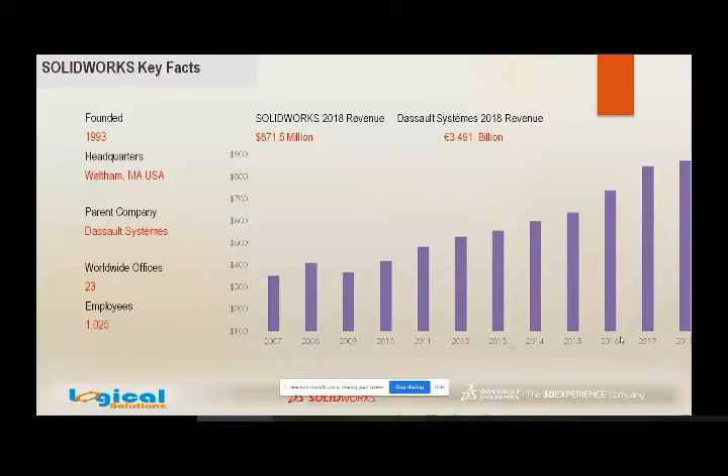Let me move on to the next slide. SolidWorks today has been used by over 5.6 million users around the globe, in over 2.75 lakh customers, in 80 countries, having one passion, that is design.

So apart from the counts, we also have certified users. So if you have any manpower requirement, we can provide you with certified users.

Coming to MySolidWorks, MySolidWorks is a one-stop online solution for all SolidWorks tutorials. If you have any queries, you can watch the complete tutorial videos provided in MySolidWorks and all the e-courses.

When coming to 3D Content Central members, 3D Content Central is an online website where you will find all the SolidWorks community members. Whoever has SolidWorks in their industry, those members are in 3D Content Central, sharing their 3D and 2D designs. So if you like their designs, you can approach them, or else directly place a quotation. It's purely a marketing tool.

When it comes to serving industries, SolidWorks is not just confined to one particular industry vertical, let's say automotive. It has expanded to various industry verticals like aerospace, engineering services, process and plant, industrial equipment, consumer products, high-tech electronics, whatnot. You name it, it has expanded its wings in all the industries.

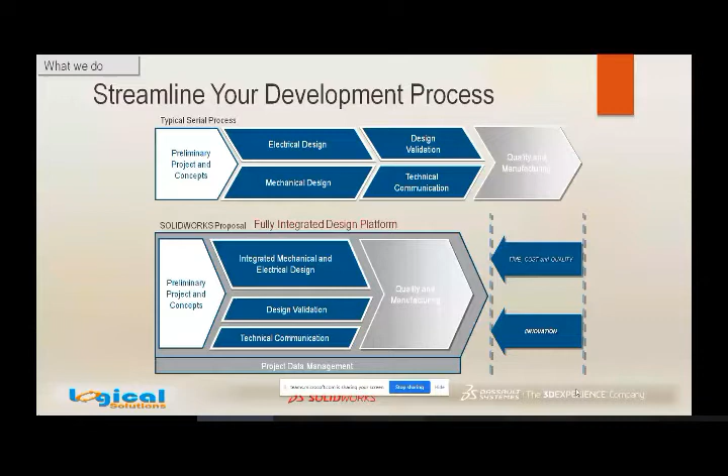Coming to the basic package that we offer, that is a 3D CAD, in which we design SolidWorks mechanical components. This is a basic for all the packages, SolidWorks mechanical CAD.

After this, if the designer is interested in performing any simulations, we have SolidWorks simulation, flow, and plastics modules. All these are actually add-ins.

If the industry is oriented towards electrical, we have SolidWorks electrical, 2D and 3D schematic, and PCB, printed circuit board. So we have these modules also included in electrical.

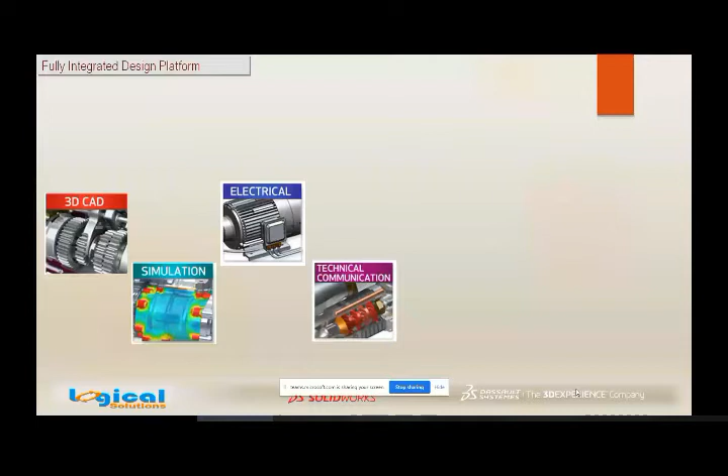Coming to technical communication, it has eDrawings, DraftSight, and composer in it. All these are used to create brochures, manuals, service manuals, repair manuals, and assembling and disassembling manuals.

Moving forward, visualization - SolidWorks visualization is a great tool to create models that look realistic, how they look in real life. We can render these models.

Coming to product data management, when it comes to legacy data, we all know that it has to be secured. So we have a solution for that, product data management, SolidWorks PDM. We can also create any revisions in PDM.

Now SolidWorks CAM is integrated to SolidWorks CAD. So whatever you model in the 3D environment is linked with computer-aided manufacturing.

Let us talk about the 3D CAD advantages which we offer, starting with part design. When it comes to other industries who opt only for 2D softwares, you can see that in 3D softwares we have the flexibility of seeing the model, how it is designed prior to manufacturing. So we can rectify all the errors beforehand.

We can apply color, we can apply material properties like mass. You can get surface area, you can get how much volume it is enclosed within. With these kind of things, you can eliminate manufacturing errors to a great extent.

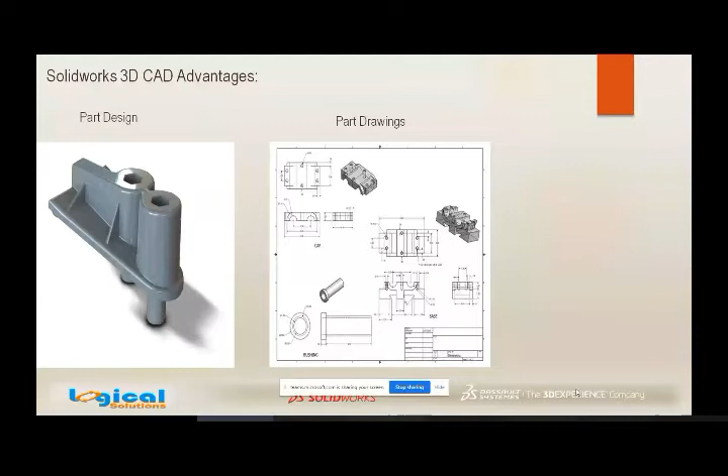Coming to assembly design, it is very easy to position any component and create animations of assembling and disassembling videos. These kind of things can easily be done in the assembly design. These are the advantages of 3D CAD.

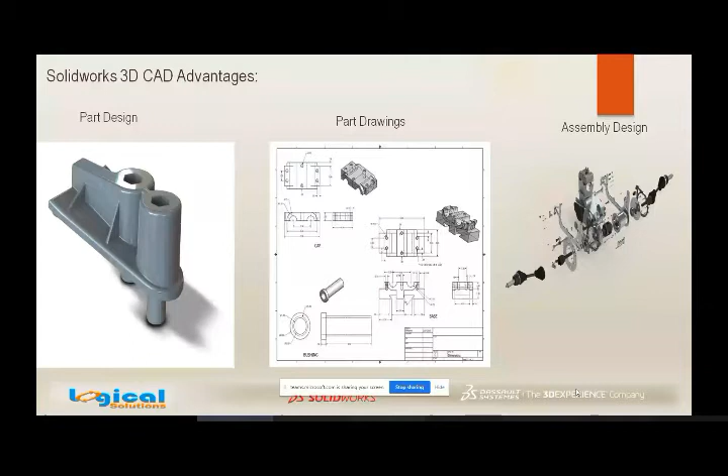Apart from that, assembly drawings can easily communicate between the designer and the manufacturer. You can see how easily a person can understand these kind of things. You can take advantage of automatic ballooning, and you can use configurations to cut open the assembly like this to show more details. Such is SolidWorks.

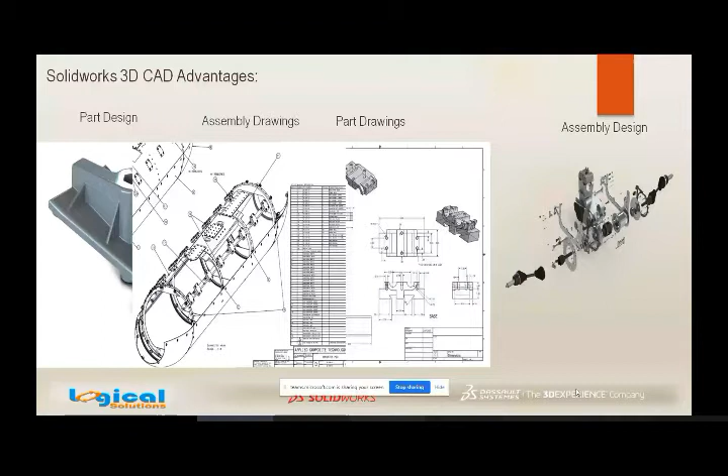Then eDrawings is an effective communication tool. If a designer has to show his model to the manager, he can use eDrawings. In eDrawings, the part feature history is not shown. Only the distance can be measured.

You can section the component. You can perform any animations with all the views - Control 1, Control 2, Control 3. All the views can be animated in eDrawings.

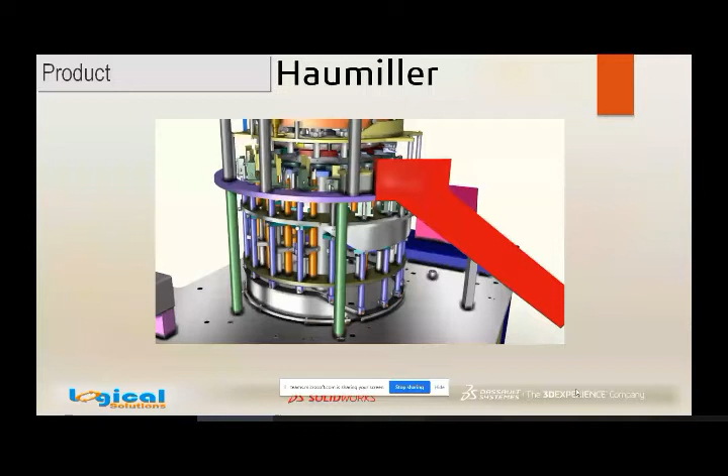Let me show you an animation so that you can easily understand what I am about to say. So this is a Haumiller. You can see how it is rotating. It's actually following the path which is below, and you can see here the green color part which I'm about to design.

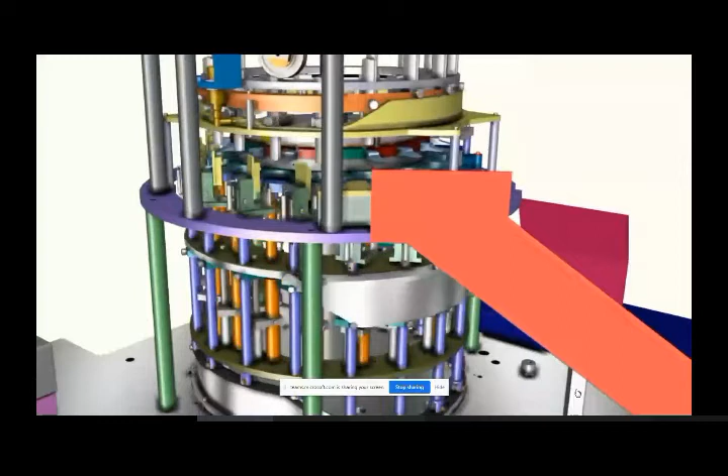You can see how it is having a reciprocating motion. With that motion, it will actually perform a capping procedure. So that brings us to the end of the animation.

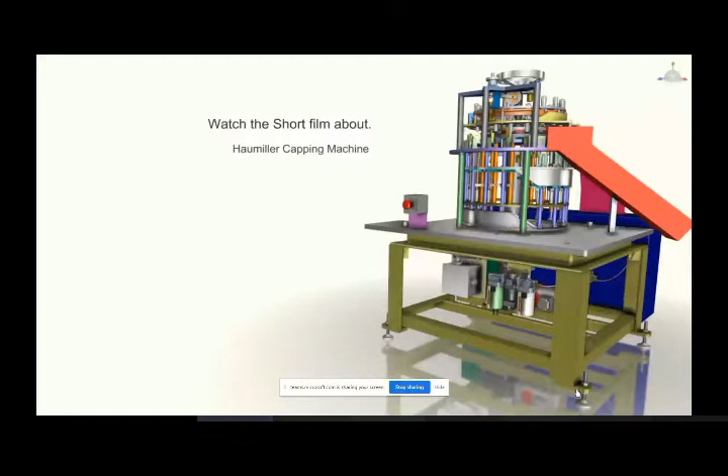Let me move to the next slide. In this slide, we are going to see how easily we can design a part in SolidWorks and how effectively we can create drawings. I'm going to take you through this. Let me open SolidWorks.

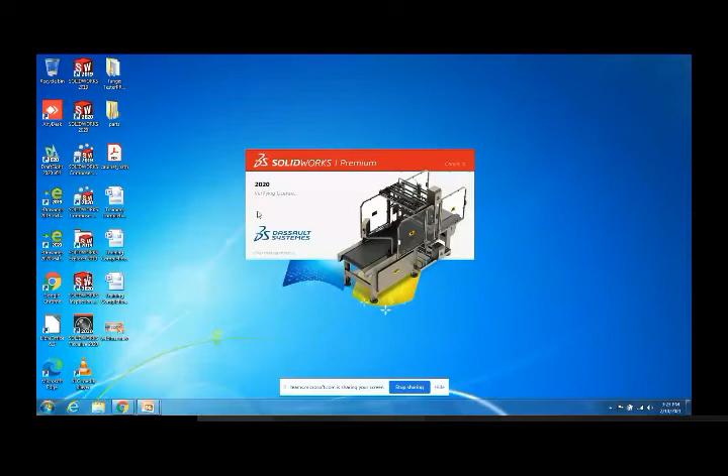So it is taking some time to open, but meanwhile, this is the part design. We'll see how easily we can create parts and drawings.

When it comes to other softwares, drawings become troublesome. But in SolidWorks, it is very easy to create sectional views, to dimension the views from the models, to arrange the dimensions and make modifications. It's very easy. Let me take you through the part.

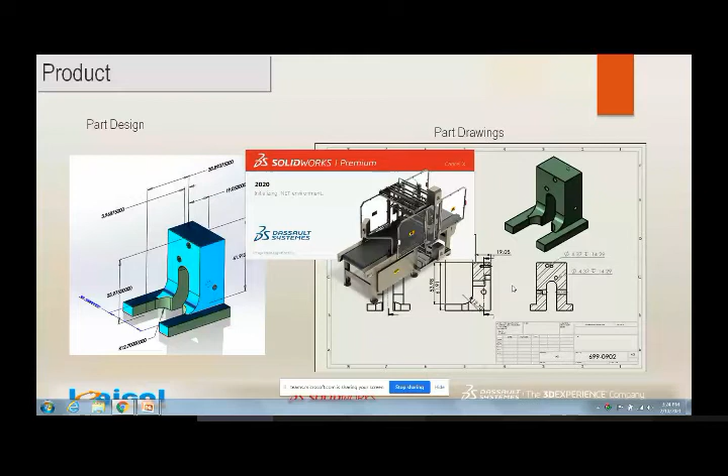So this is a part. Can everyone see this, what I'm showing you? So this is a component.

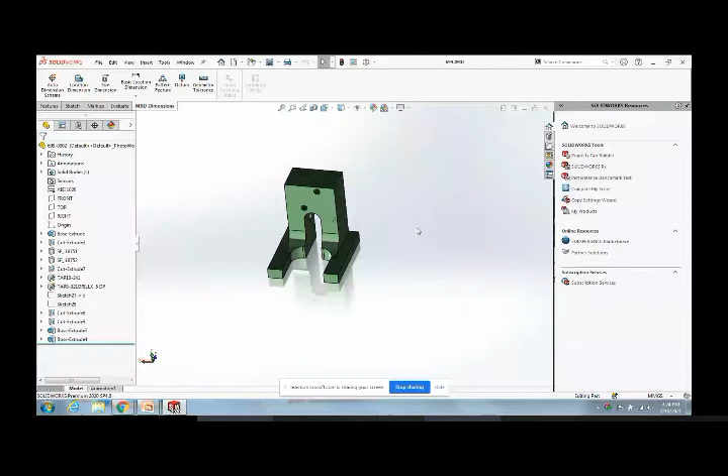Before showing you this component, let me open the assembly. Let me open it in large design review mode so it will open up quickly, and then I'll resolve it. I hope everyone knows about large design review mode.

So this is the assembly which I have taken as an example. In this assembly, I'll take the example of this component you are seeing here, and I will model this component. Let me open this component.

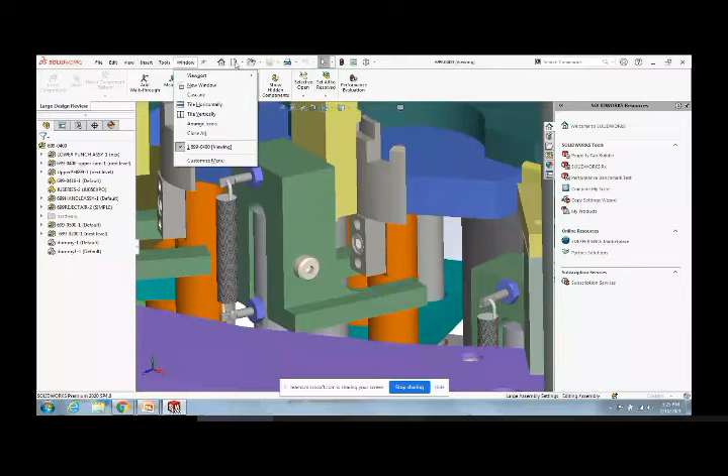So this was the component I showed earlier. Let me use the rollback bar and show you how this component has actually been created.

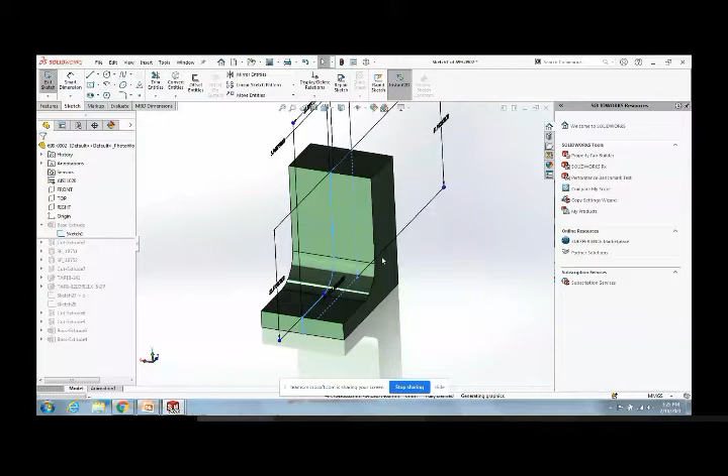So you can see if I go into the sketch, I'll just delete one dimension and show you how to dimension it. So now it is fully defined, and you can make use of the shortcut bar.

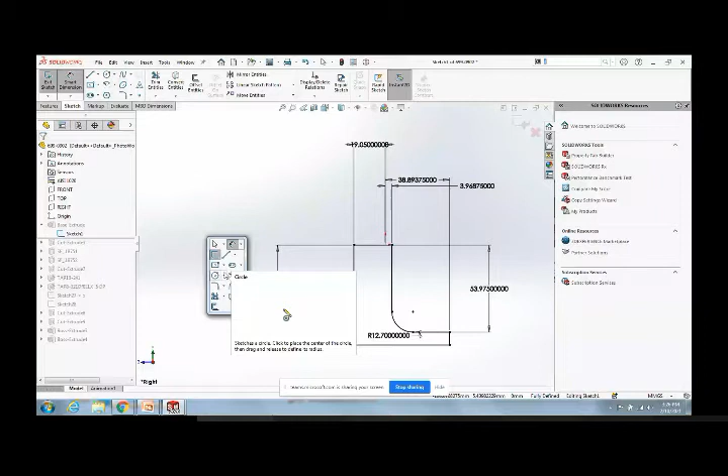In the shortcut bar, you can see all the commands you frequently use, and you can place them in this shortcut bar. Okay, so a couple of cuts like this.

So finally, it has been built like this. Let me create a drawing of this. So this was the drawing I already created. Let me close this and create a new drawing.

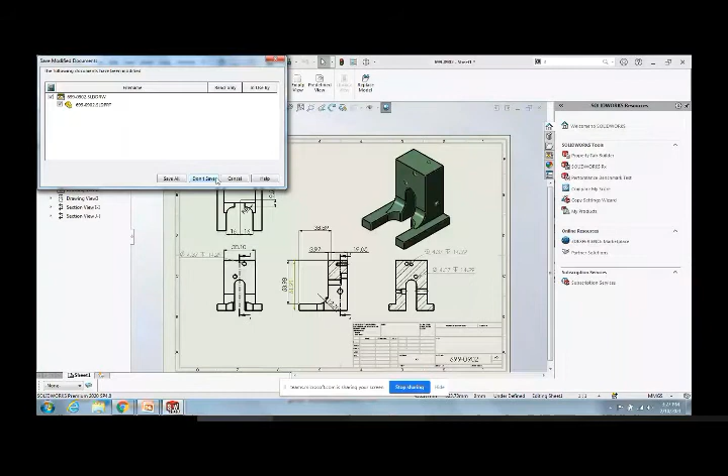So I'm choosing the file, the sheet size. Click OK. Now in the view palette, you can see the views have been automatically populated, and I'll just drag the top and front view, and with the projected view activated, I'll get the top projection also.

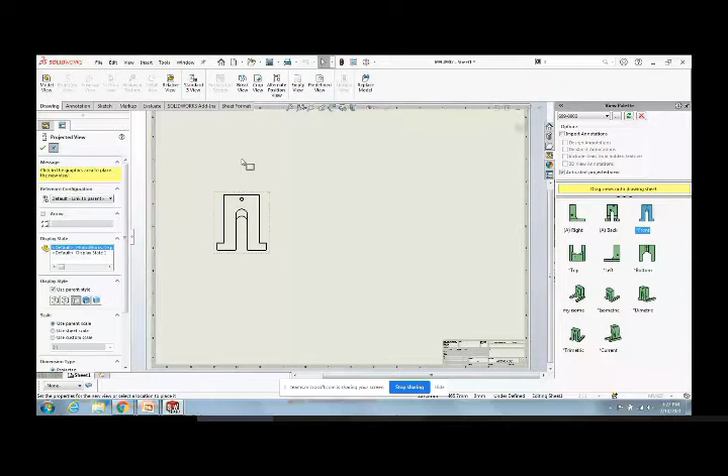So, using these two views itself, I'll perform a sectional cut using the mouse gestures, and you can see how easy it is to create. Another sectional view, I'll create it over here.

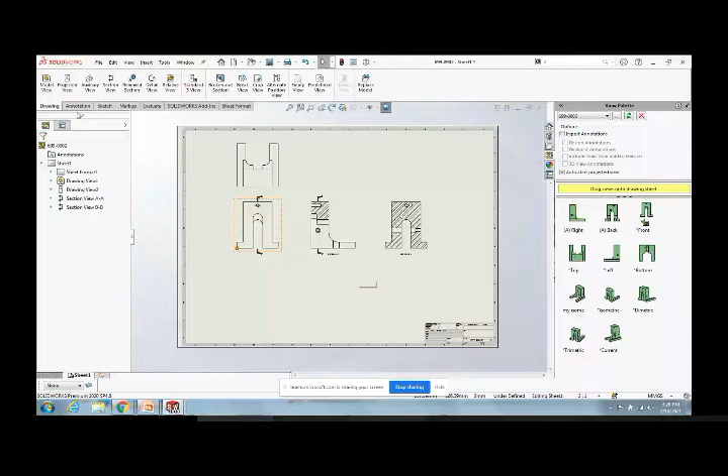So I'm actually showing all the hole details over here, and now we want some dimensions to cover it up. So we will go to Annotations, Model Items, and choose these features. You only use the selected features in the model items.

Like this. Use the hole callouts—it is best to use hole callouts when you have hole wizard features done in the part, because it will give you detailed text like this. You can see it will give you the symbol representation, whether it is a counter bore or counter sunk, and through-all as well, these things.

So when it comes to changing the hatch, you can just select it. You can apply the hatch according to the materials, different hatches.

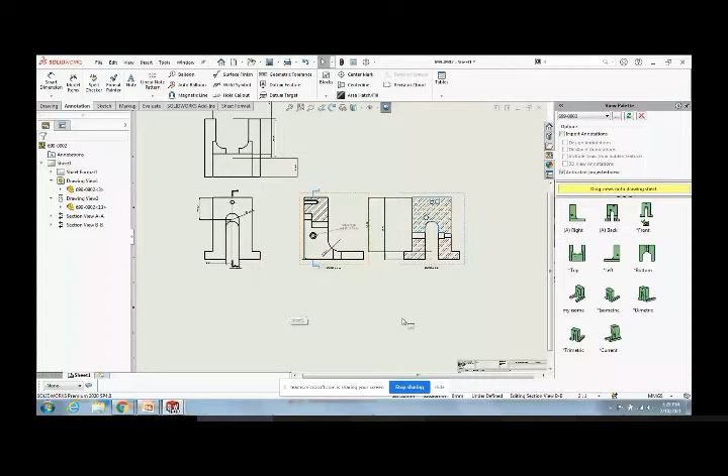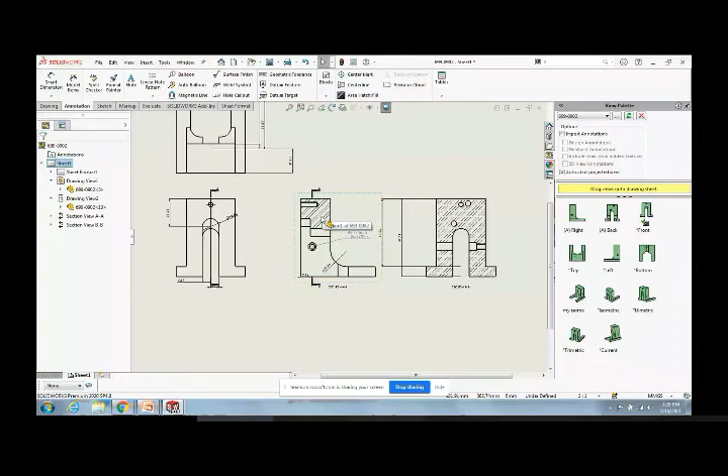So if you want to change the dimensional sizes, let me show you the dimensions. Just go to font, and you can increase the font to automatically see the changes—I'm increasing it to 15. You can see it has been increased. So accordingly, all the things like the dimensional arrow sizes can be controlled in Options, Document Properties. You can look forward to this.

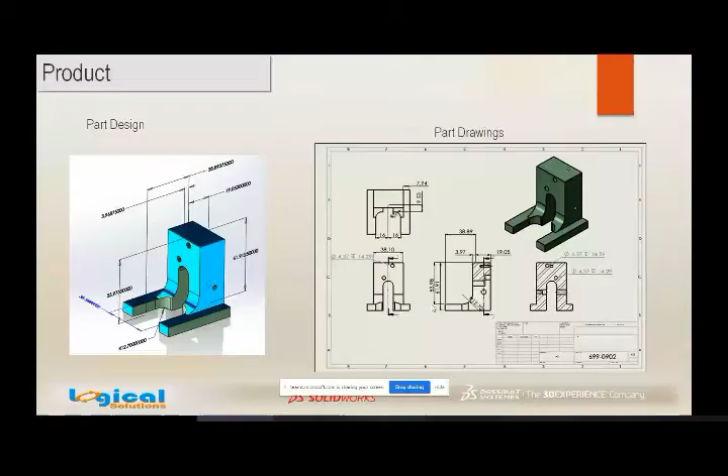Let me go back to the presentation and explain the benefits of part designing. The advantages in part designing and part drawings are using the shortcut bars. Shortcut bars give great flexibility when a designer is working in full screen mode.

All the tools they are familiar with, they can include in the shortcut bar and use them effectively. And when it comes to learning SolidWorks, the learning curve is very good—you can see how all the commands have been categorized specifically, like features are categorized where only features are there.

Sheet metals categorize only sheet metal features, and weldments categorize only weldment features. Likewise, everything is categorized, making it easier to learn. So new people can understand SolidWorks in about 1 month itself.

So that is a great advantage we offer. Hole Wizard features, as I already told you, consist of over 1 million different standard holes around the globe. You can make use of this, and also use smart fasteners, which come with all the toolbox components with the exact sizes of the holes.

Automatic view placement lets you just drag and drop the view and place it over the drawing sheet. You can get all the dimensions, populate all the dimensions, and arrange all those dimensions. I just forgot to show the arranging of the dimensions.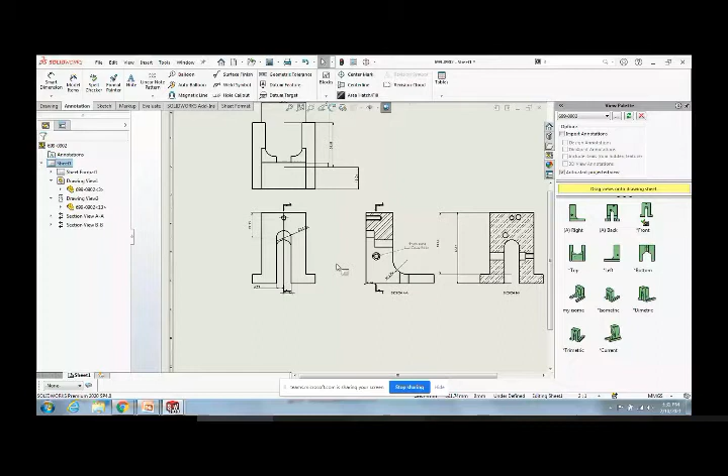If some dimensions are going into the view, let me show you, these kinds of things can be easily resolved. You can just drag it and use auto arrange, and automatically all the dimensions will go out of the view. So these are automatic arranging of the dimensions. We can take advantage of automatic view placement, automatic dimensioning, and arranging of the dimensions.

So with all these advantages in the part designing and part drawings, we can actually avoid the drawing errors effectively.

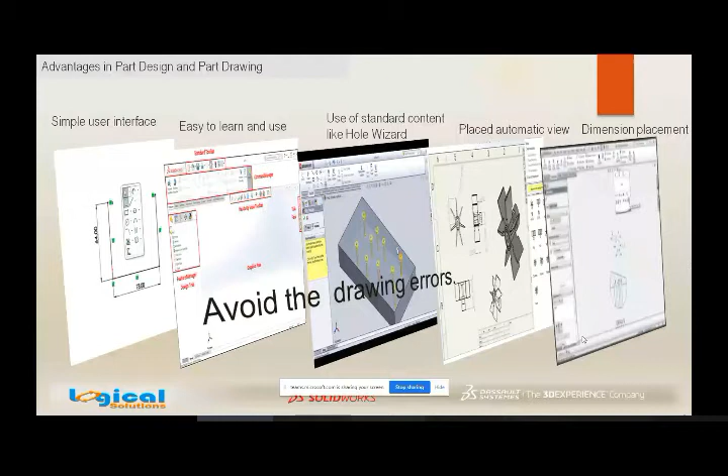So we'll move on to the assembly design. Let me open this assembly I'm showing you and create the assembly drawings, also generate bill of materials, and generate automatic ballooning. Let me open SolidWorks.

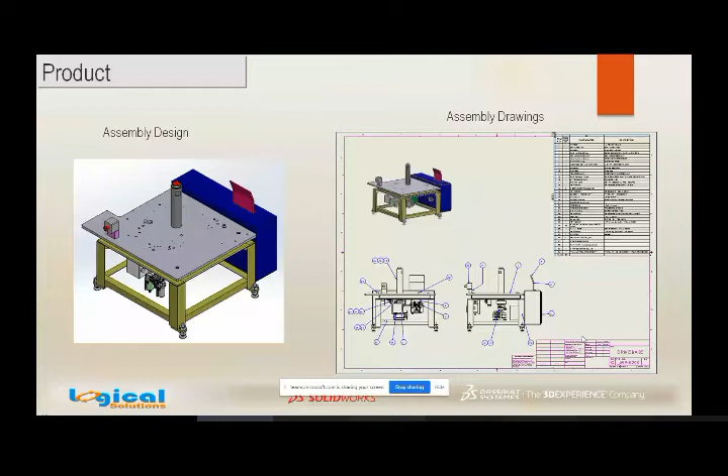So this was the assembly. I just quickly set it to resolve. It will take some time to resolve all those components. Meanwhile, in this assembly, I will open a sub-assembly, which you have earlier seen in the presentation, and show you how to position a component.

It will take a while to resolve all the components, because this assembly consists of more than 1,000 components. Meanwhile, if you have any queries, you can post them in the comment box. We have our technical team involved in this activity.

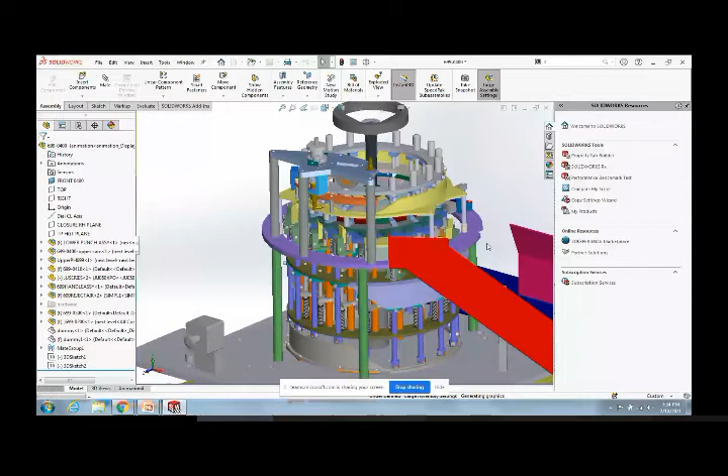It is completely based on the performance of the system. If you use a very good system, it will take very less time. If you use a moderate system, it will take about a minute or two. So as of now, the assembly is completely resolved. So let me think, just give me a second. Assembly is not yet properly resolved.

Yes, now it is resolved. So now we will see. Let me take the example of this button itself over here, this component. Let me open it in its own window. So this is a basic component. Let me show you how to insert this component.

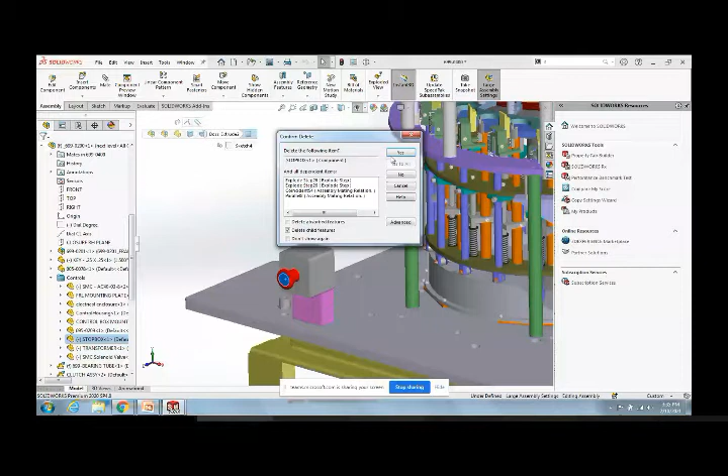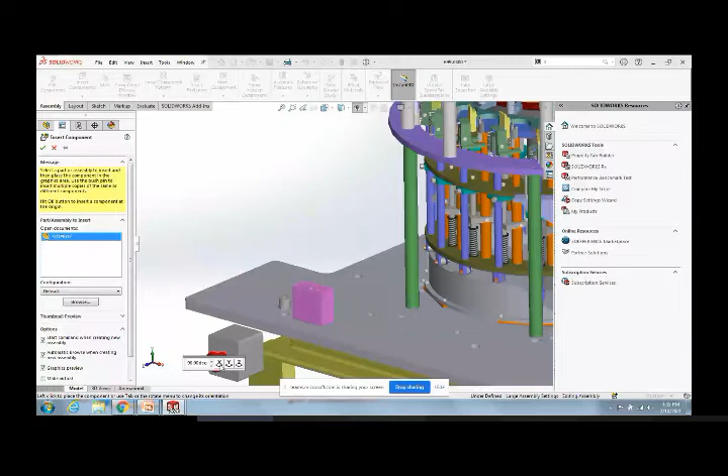Before that, I will delete this component in the assembly, deleting only the selected components. Using the insert components function in the assembly, I'm going to insert the component which is actually opened in the background like this. While I'm placing it on the graphic user interface, I have an option to rotate this component in X, Y, and Z axes, and you can mention the increment too. So this is okay, I'll just place this.

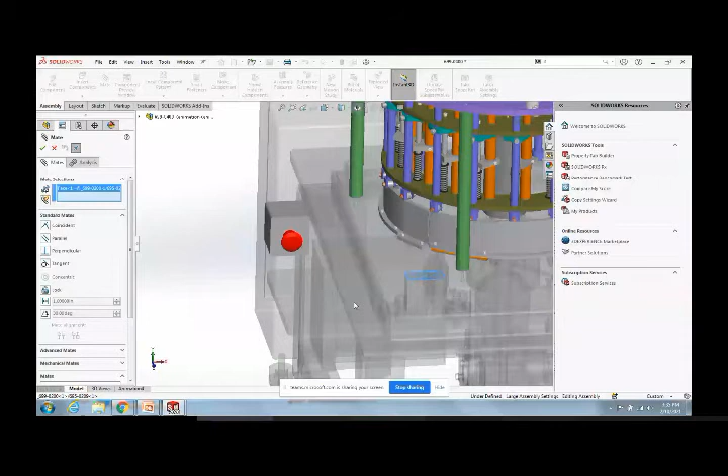Now, in order to restrict the 6 degrees of freedom, we have to apply mates. So we'll go to mates and select these faces. You can see a coincident mate is applied. Now let me apply a width mate, which will bring this component exactly in between these components. Let me make 4 selections and apply the quick width mate. You can see while I'm restricting the degrees of freedom, it is moving only in this direction, so I'll fix this.

Let me show you a broken out section in a couple of minutes in the assembly drawing itself.

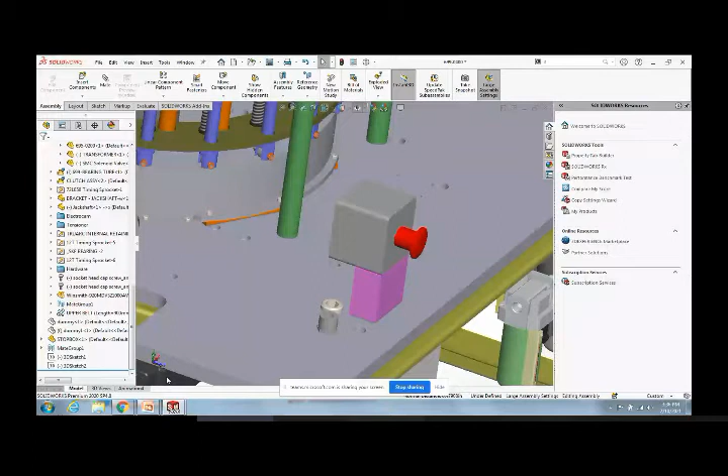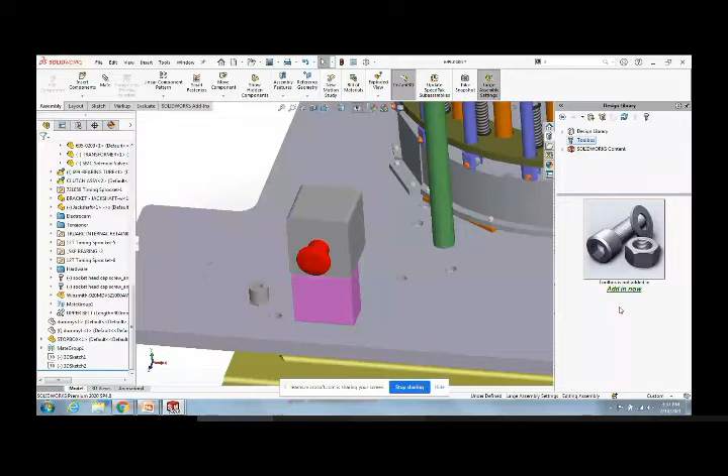So this was how a component has been inserted. Let me show you the toolbox components also. In toolbox components, you can have different sizes of nuts, bolts, and washers, over 1 million standards. You can see how it is categorized: ANSI inch, ANSI metric, BSI, CISC, all these standards. And if you go in, you have bearings, bushings, nuts, all these things. You have an inbuilt toolbox with SolidWorks.

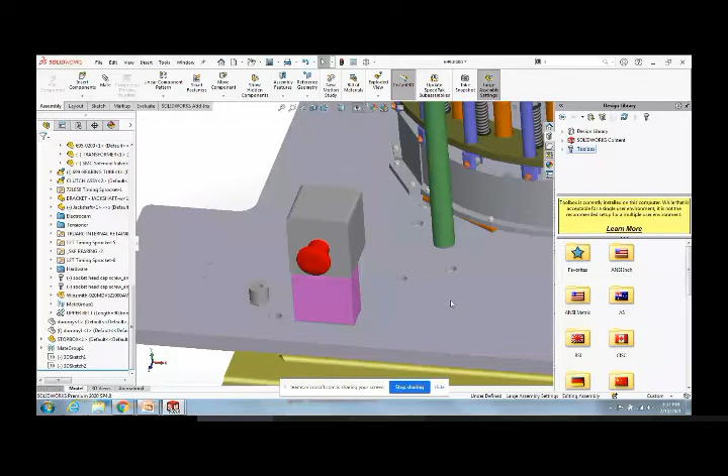So let me create a drawing before this. We'll open this sub-assembly. This is the sub-assembly.

So this was a sub-assembly. Let me open a drawing which I have already created.

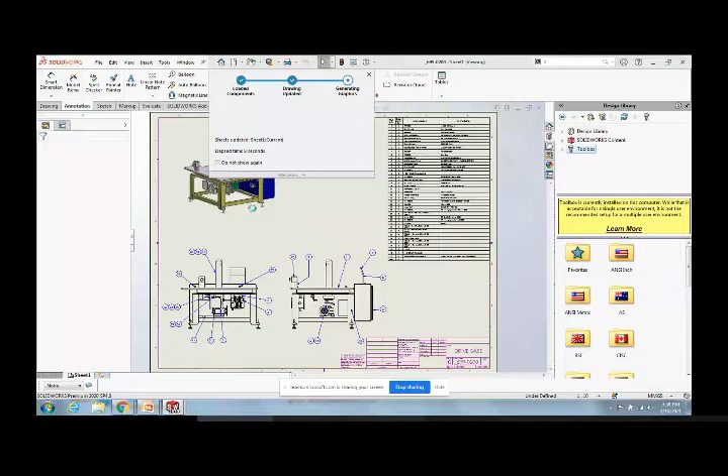You can see how I have properly aligned the isometric view and ballooned different components, and of course generated the bill of materials. If you like this kind of bill of materials, you can save it as a template instead of always creating a new one, and use it a number of times. I suggest using these things.

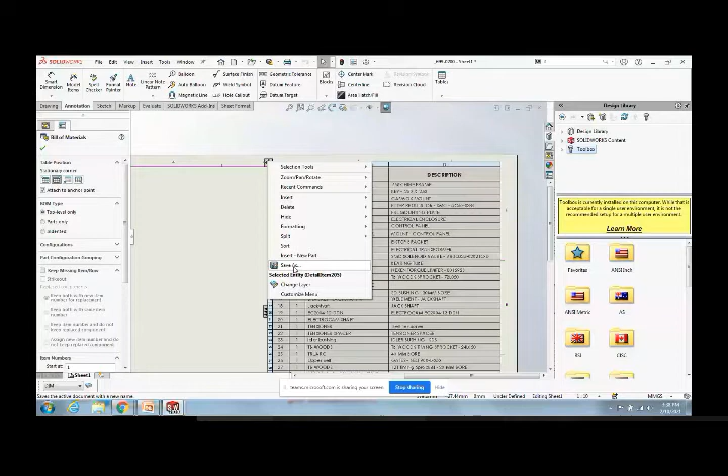Let us perform a broken out section over here. We have a couple of details over here, like beneath we have a motor which is running this shaft. Let me show those details.

Go to drawing view, and here we have a broken out section. Just draw a spline, click OK, and show preview. Now just increase the preview until you get the cut in this view.

Please excuse me, it's taking a little while. So I don't know the reason why it is taking such a lot of time.

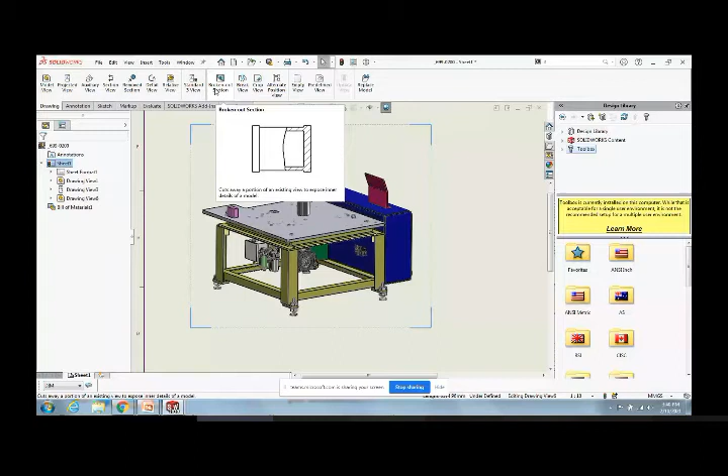Let me move on with this presentation. You can see here how in this assembly I have created bill of materials, and in the bill of materials you can see the item numbers, the quantities, and all these properties like description of the components. You have so many components, up to 37, and also in the ballooning, except for one, we have the rest of the balloons in place.

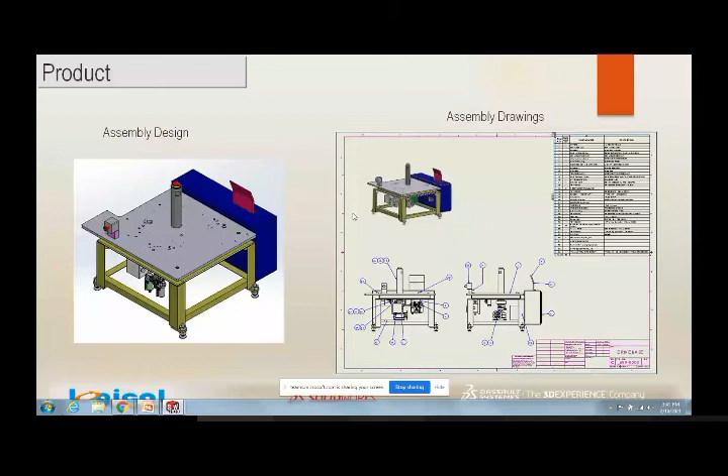Let me move on to the presentation. So like this, you can easily create assemblies using SolidWorks.

When it comes to advantages, let us talk about the advantages in assembly. It is very easy to position any component in the assembly environment before placing it. Also, we know that the first component will be fixed, but the second components should take the movement with the first component.

We have the Toolbox library, which has over 1 million inbuilt components - nuts, washers, bolts, bearings, all those things included in the Toolbox library.

And of course, in assembly, if you have any moving components and you would like to assess the velocity or acceleration with respect to time, or displacement with respect to time, you can make use of assembly motion, SolidWorks Motion. You can make use of that very well.

After that, you can make use of automatic bill of material generation and automatic ballooning of the components in the exploded views.

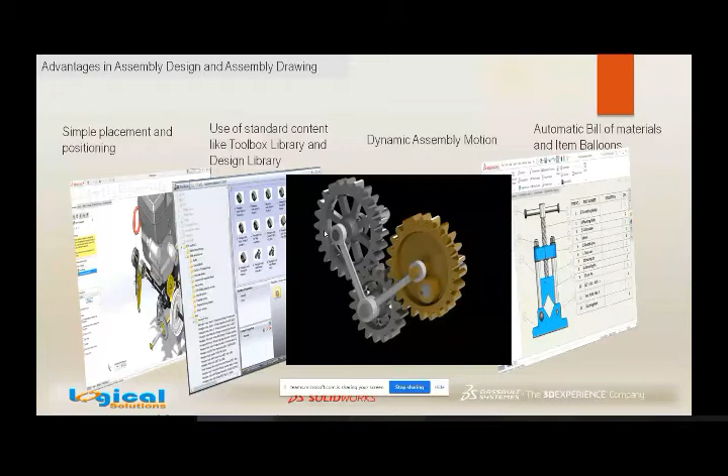Apart from this, SolidWorks also offers a couple of advantages with the software. Let me show you. Firstly, design automation. If you are keen on automating your design stuff, you can choose this. You can use equations driven through Excel.

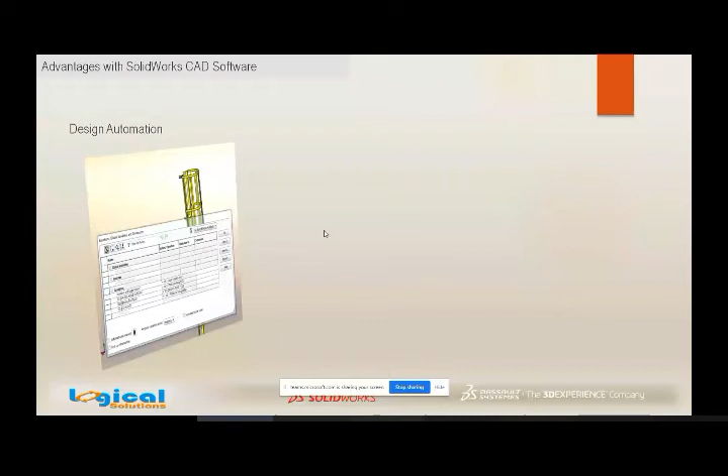Secondly, you have API macro customization, in which if you have proper knowledge of VBA, Visual Basic Application, you can choose API macro customization with Excel, where all the parameters are controlled with one particular parameter.

Next, cost estimation. In cost estimation, you can actually assess the cost of the part, including all the manufacturing costs, the material cost, and also in the end, you can add the margin you require to the cost. This is actually a very great tool which can be used effectively.

And 3D interconnect. We have so many CAD softwares in the market, so it is very important to connect with all the softwares. SolidWorks is actually now connected to all softwares - every other CAD software file can be imported into SolidWorks using 3D interconnect. It is actually a bridge between the third-party software and SolidWorks.

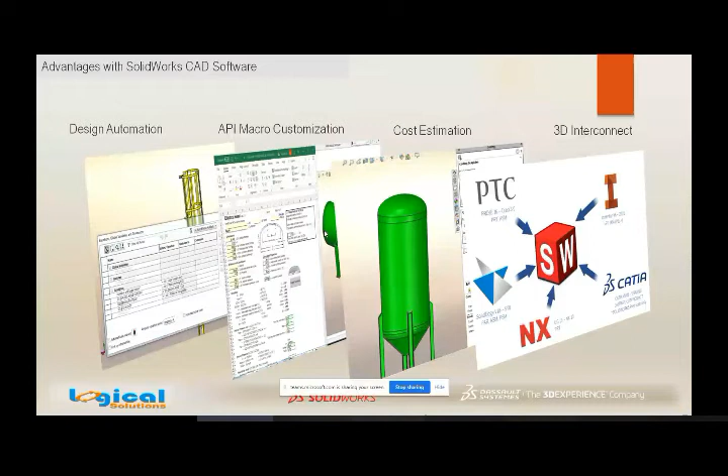And many more advantages we offer, like ECAD, MCAD collaboration - electrical CAD and mechanical CAD have been collaborated, where if any changes happen in the mechanical CAD, the electrical CAD will also be updated.

Integrated piping and tubing - you can perform piping and tubing in SolidWorks premium version of the software, and of course electrical wiring is also there. Design standard checker - again, if your industry has any standards, like any templates, you can check whether any newly generated drawing is actually meeting the standards or not.

And you can effectively create animations of assemblies, like assembling and disassembling animations, and for that matter any different kinds of animations also for hydraulic machineries, and you can render those animations to see how they look realistically in the real world.

And task scheduler. Task scheduler is actually a very good tool offered by SolidWorks, in which if you have any repetitive tasks to be done, like converting SolidWorks drawings into PDFs, you can convert 500 drawings into 500 PDFs effectively just by setting a time lapse, during non-productive hours - like in India, mostly they have 9 to 6 working hours. You can set up non-productive hours, like from 6pm to the next day. You set up the time, and when you come in tomorrow, you will have all the things done at your desk.

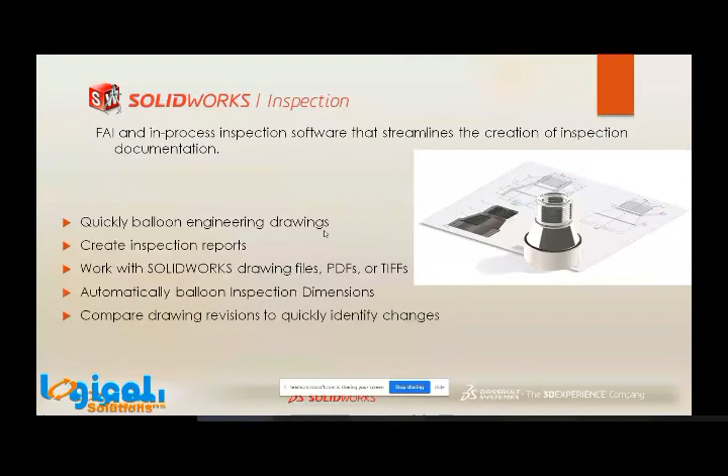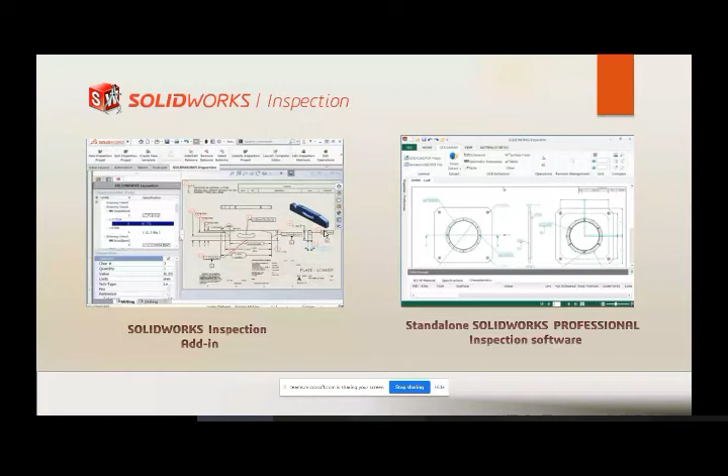Let me move on to the next slide. We have two versions of inspection: standard and professional. Both have access as a SolidWorks add-in and as a standalone version of the inspection software.

Let me show you the hands-on session of the SolidWorks add-in. Let me close all these files. I'm trying to open a drawing wherein I can perform an inspection of all the dimensions. So let me open a drawing.

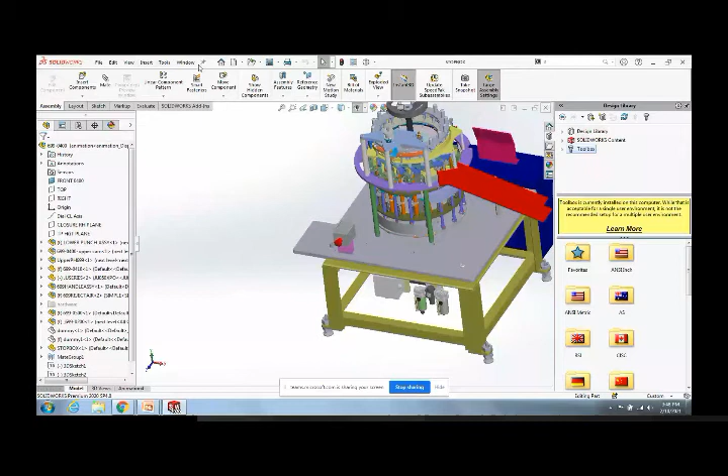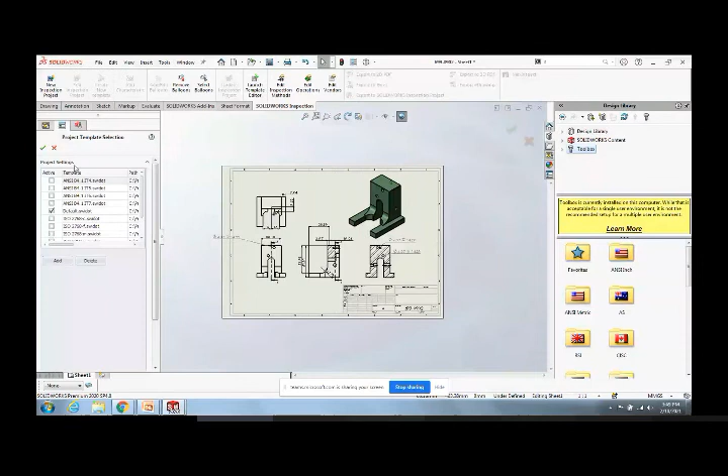So here is the inspection add-in. Let me guide you through creating a new inspection project, where it calculates all the characteristics. But before that, we have initial settings, like selecting the template. I'm choosing the default template and clicking OK.

You can see here the characteristics, which are the dimensions. Let's say this dimension, I want to give it as a height, so this is the height characteristic I am defining. You can also enter part details, part number, and part revisions over here.

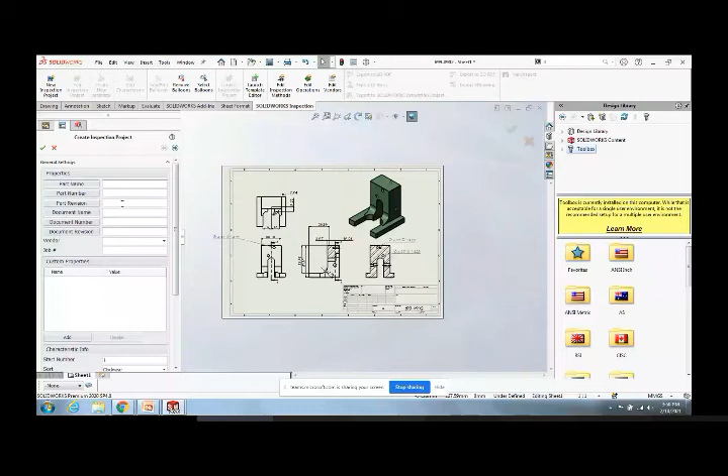Let me quickly do all this stuff. Now you can see SolidWorks inspection add-in has automatically added balloons to all the characteristics which I have given in the drawing. Beside all the dimensions you get one balloon, and in the characteristics, if I expand it, you'll get a little more clarity.

You can see here 14.29 depth and the radius, the dimensions of the sheet. All these details have been effectively compiled into a list like this.

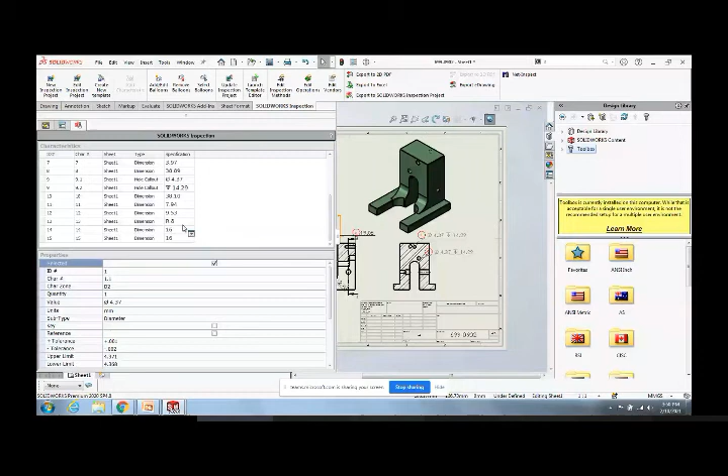After this, you can export it to 2D PDFs, Excel, and as an inspection project. If you're working on a standalone inspection software, you can also export it to an inspection project, to eDrawings, or to 3D PDF. Let me show you exporting it to Excel.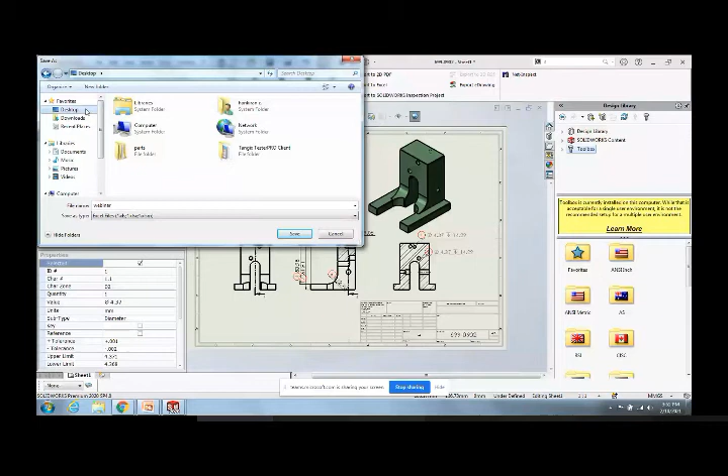So I'll give it a name. So all these characteristics, the dimensions, are shown as ballooned. Once it is ballooned, you can then check for revisions and verify the dimensions. You don't need to specify the exact value; you can just show that a particular dimension must be changed. So effectively, you can perform the inspection. This is actually a first article inspection in Excel.

So this was the flexibility of using the SolidWorks add-in. Let me just close this.

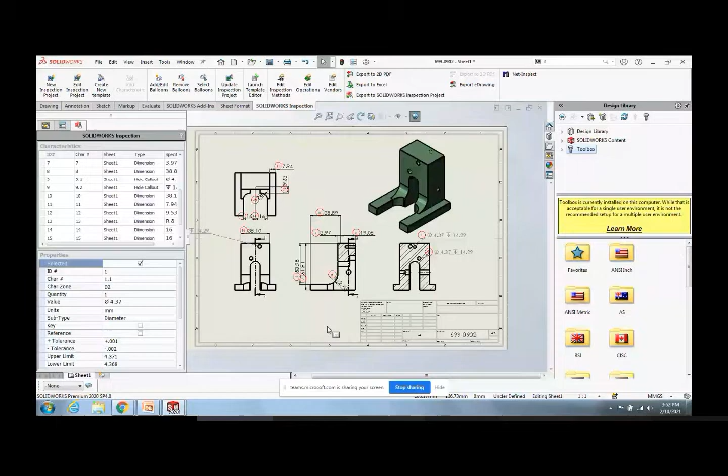With the SolidWorks add-in, we can quickly and automatically balloon engineering drawings into inspection dimensions. We can create inspection reports and export them to 2D PDFs, 3D PDFs, Excel, e-drawings, and standalone inspection software, where you will have additional capabilities to perform. Let me move on to the next slide.

Let's talk about the standalone version of the SolidWorks inspection software. Additionally, with these capabilities, apart from the automatic ones, we also have manual or semi-automatic capabilities. You can enter measured values directly into the inspection project. SolidWorks inspection software enables you to leverage legacy data regardless of the file type, where you can work with PDFs and recognize the GD&T reference frames into the inspection project. Let me show you what I mean in just a moment.

So this is the standalone inspection software. Let me just open this—it will take some time. Meanwhile, let me explain in the presentation.

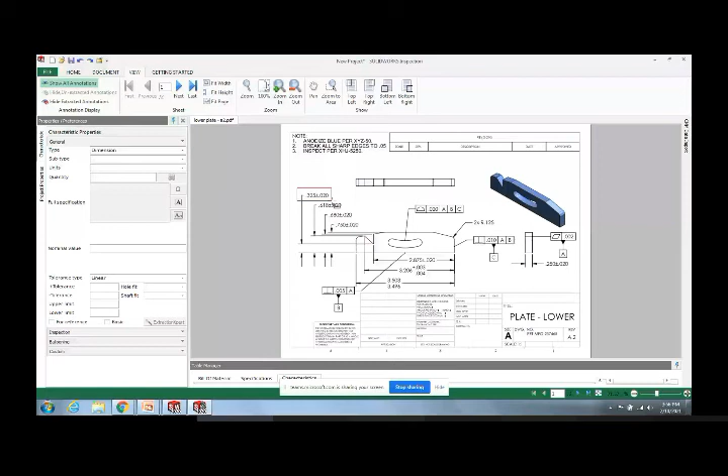Let me show you how the dimensions have been recognized. You just right click, and in the OCR extraction, I'll extract the dimension here. You can see this is named as 1. We'll decrease the size of the balloon—don't bother about that right now. You can see 2, 3, 4. So you can see the way it is actually creating the characteristics.

I'll just select this characteristic. For GD&T, you right click, go to OCR extraction, and select GD&T tolerance frames. So this is the 6th one. You can see in the default it got flatness, but we can change it to perpendicular.

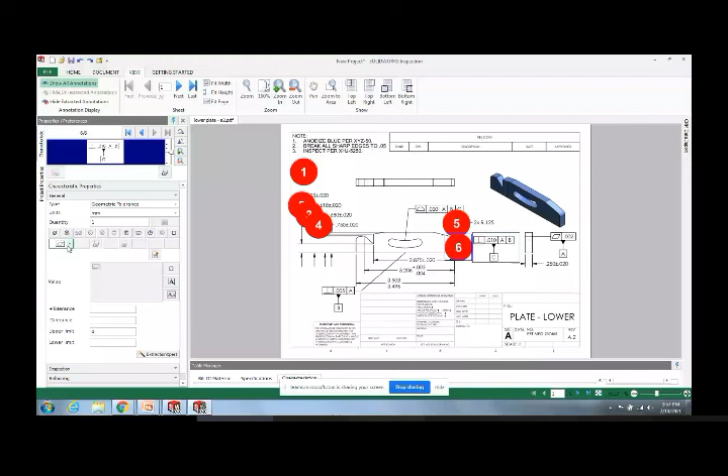We'll save the project in the meanwhile—yes, replace it. You can give any modifiers if you have any, or else you can give the datums. Let me specify the tolerance as 0.010. If you have modifiers, you can give least material or maximum material condition, or just give the A, B, C datums.

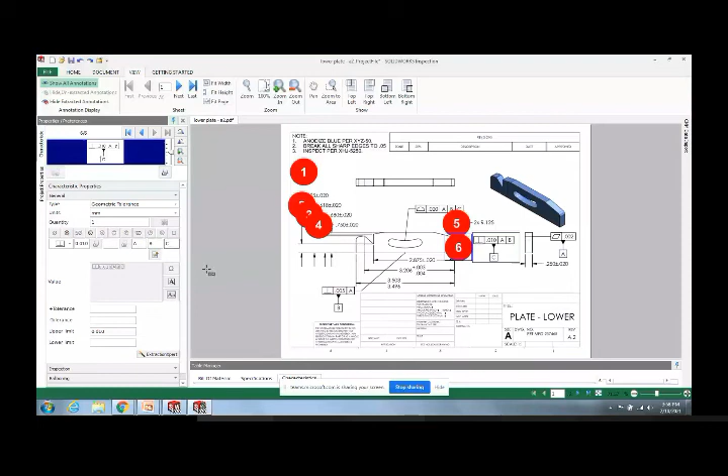If I just drag the table manager here, you can see the bill of materials and the characteristics. These are the characteristics I have recognized, and you can see how the geometric tolerance has been recognized. Initially, it was recognized as flatness, but now we have changed it, and it is properly recognized.

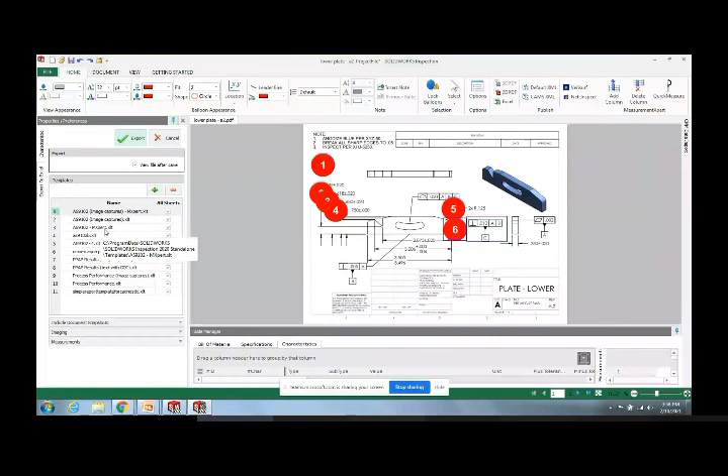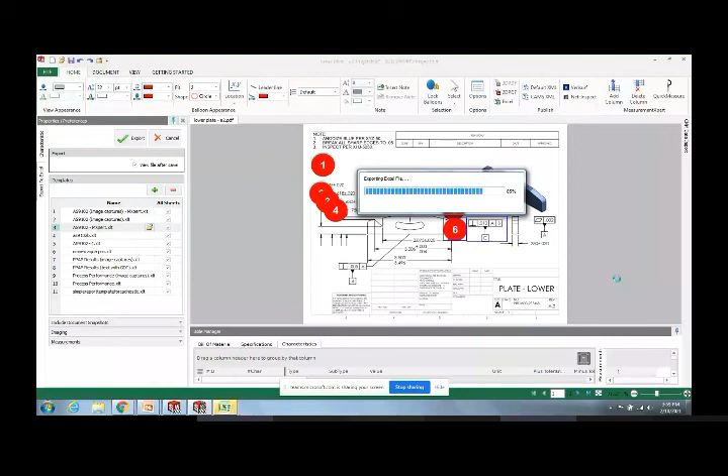So this is the first article inspection tool. Let me show you how the CMM data input can be given to the inspection project. Before that, I'll just close this inspection. Now let me show you.

So in the tolerance given for these dimensions, you can see plus or minus tolerances over here. So apart from that, if I give any other tolerance, it will actually be color coded.

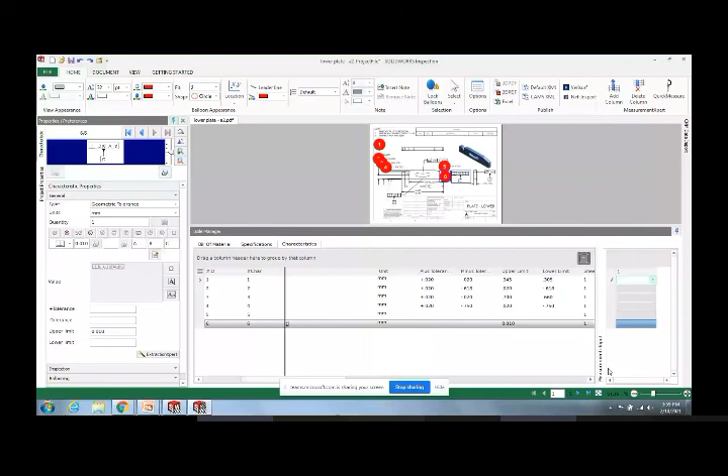Let me show you 0.1. Very far, that is the reason why it is red color. So let me give 0.01. This is a different color. So it's actually categorizing to show the importance in the Excel first article inspection.

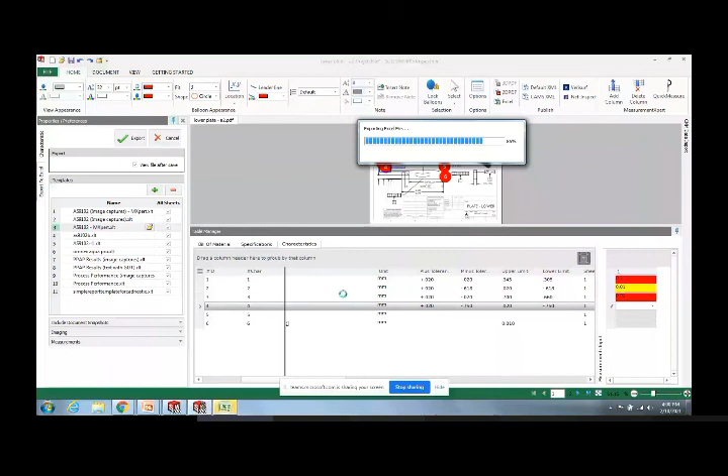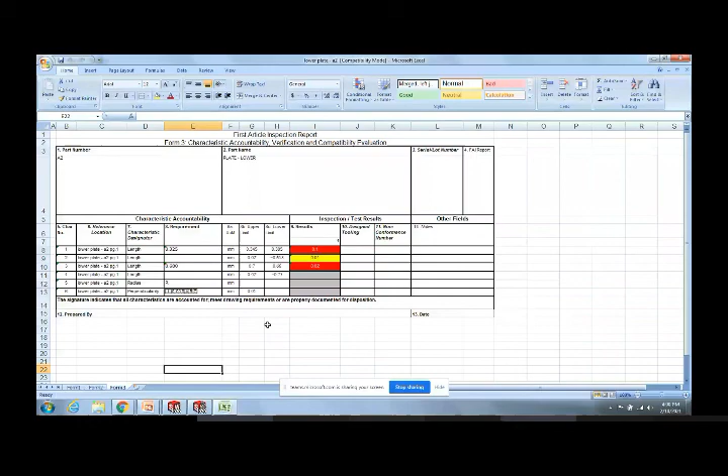Let me go on to the presentation. So these were the additional things apart from the add-in SolidWorks Inspection add-in. You can manually or semi-automatically enter the measured values directly into the inspection project using the OCR tool.

Yes, the OCR tool. SolidWorks Inspection software enables you to leverage legacy data, regardless of the file type, whether it can be a PDF or an image. But note, if you are working with an image, the pixels should be proper so that it is recognized in the OCR tool.

So moving to the next slide, SolidWorks Inspection Professional has these capabilities. In addition to SolidWorks Inspection, we can automatically enter the measured inspection values, and we can import coordinate measuring machine results.

You can highlight the dimensions as you have seen right now: green, red, and yellow. Green indicates that it is in tolerance, red indicates that it is out of tolerance, and yellow recognizes marginal with the tolerance. You can of course export it to first article inspection reports.

So this was about the inspection. Let us move on to the next slide and talk about the key features and benefits. We can create inspection documents faster. You can save time up to 90%.

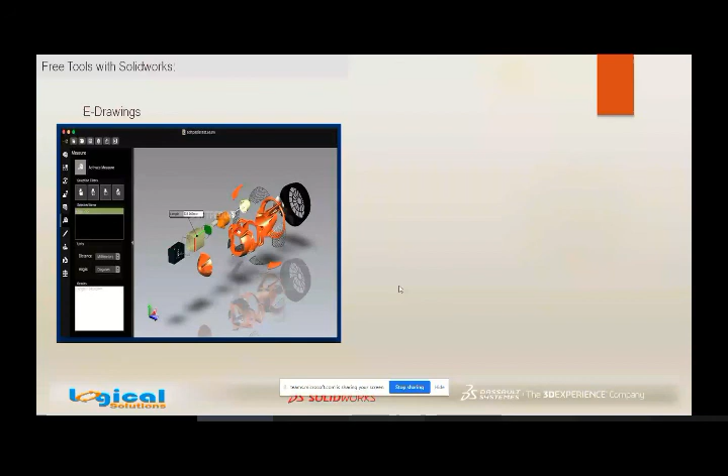So that is a very great time saver. We can also add markups if you have any changes or markups. You can add markups and add comments to the E file, that is eDrawing or eAssembly or ePart, anything.

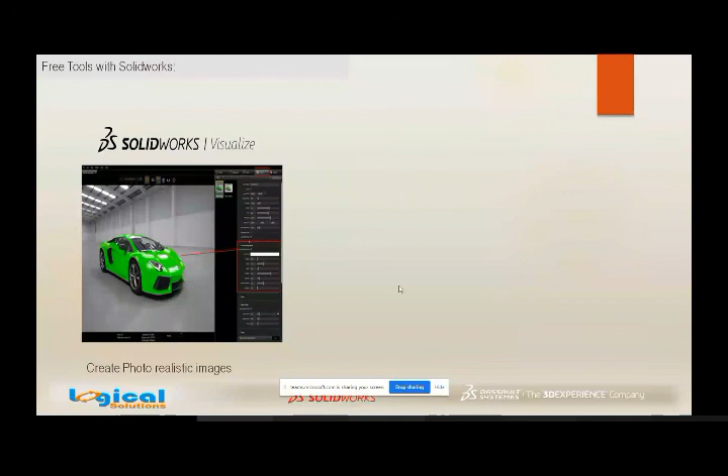Moving on to the next slide, we have another free tool which we offer with SolidWorks, but only under the subscription period - you can use these tools. SolidWorks Visualize lets you perform photorealistic images, you can render images using this software. And the next free tool offered by SolidWorks is SolidWorks CAM.

Initially, by default, you can use only up to 2.5 axis milling and 2 axis turning. So if you purchase and are interested in using CAM, you can purchase a professional version of CAM where you will get access to tolerance based machining, 5 axis machining, all those things. So if your company is completely oriented towards manufacturing, fabrication, and those things, you can be very interested in this particular SolidWorks CAM.